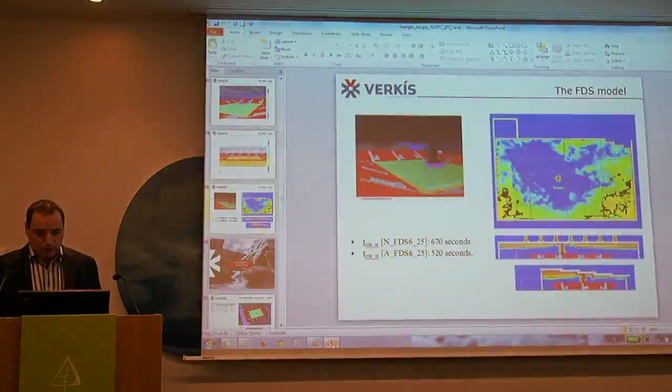So this was to show you how much work it was. It was a huge competition for Iceland and quite a big project. I think as the head of Fimleikasamband, he was rather stressed about it, and I think everything went well.

Of course, the day before the competition, David and I and some people from the Fire Brigade went through an on-site inspection. So you can see at the top that they've indeed created this famous passage in the corner. It was actually much wider than we asked, so I was very happy about it. But these are the good things.

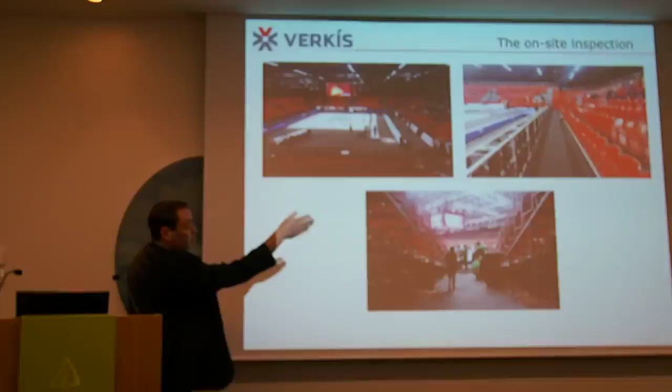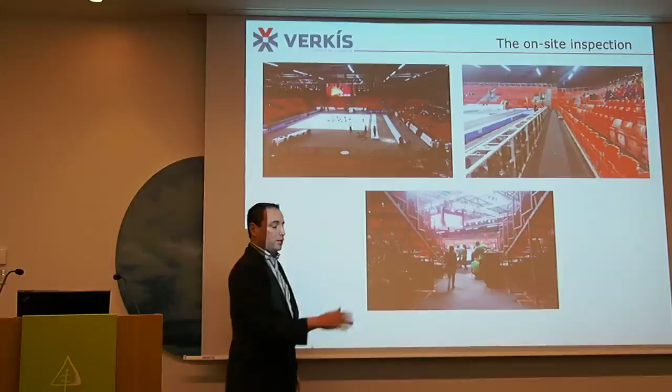You can also see we have a sufficiently wide evacuation route over there on the right, and you can see that this is just supposed to be 1.5 meters wide minimum, and this is much wider than what we asked. Now, these are the good things. Of course, not so good things, but okay, it could be improved.

After this inspection, you can see that there is a lot of equipment in the escape routes. And also these light panels over there. It narrowed the passage a bit, a bit less than 1.4 meters, so we had to have them moved a little bit. People will still be able to move them by hand and evacuate.

Of course, the classical problem is, I think there are 2 or 3 evacuation doors that are completely blocked with dustbins and all kinds of things. So we have to tell them to make sure that they remove everything from this.

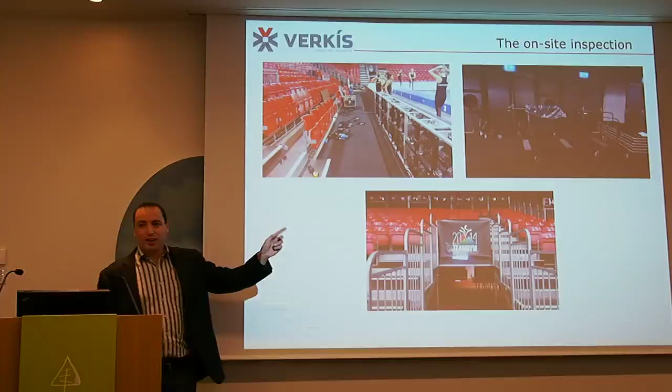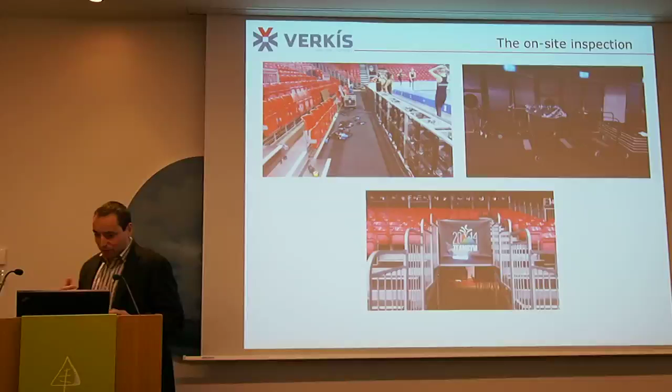And also here you can see this is the evacuation light from the stands, and they did put this logo, so I had to go and tell them at every evacuation step, okay, move this one. You could put this logo, but they just had to put it a bit higher, so that evacuation lights are very visible. So these were maybe the things that could be corrected, and I think everything went fine.

So now as a conclusion, if you look at the table at the top, you can see here in both normal and adverse conditions the critical time from FDS is significantly higher than the evacuation time from Pathfinder. So this means it's good. It means that people have a sufficient safety margin to evacuate before they get into these dangerous conditions.

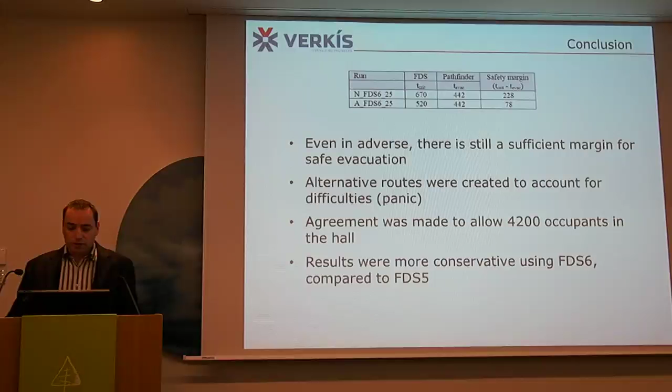Okay, so we created some alternative routes, especially for panics. So finally an agreement was reached to have something like 4,200 occupants. And I also proved in this lecture that FDS6 was actually more conservative than FDS5.

Okay, it's very difficult. That's probably the most difficult thing. First of all, what can burn, what cannot burn, and so probably this 10 megawatts. I don't think we can expect a 10 megawatt. That's actually a truck inside the room, something like this.

Question about the design fire. Yes. The placement of the design fire. You placed it in the middle of the room. Yes. What happens if you placed it close to one of the exits and block the exit? That's a very good question, especially if you look at this one.

This is the main entrance, most of the people will go this way, and we have 5 different exits. So we thought about it because here they were selling some drinks and some food. So you could imagine somehow a fire in this area. But in this case, what was very crucial is people evacuated from the stands.

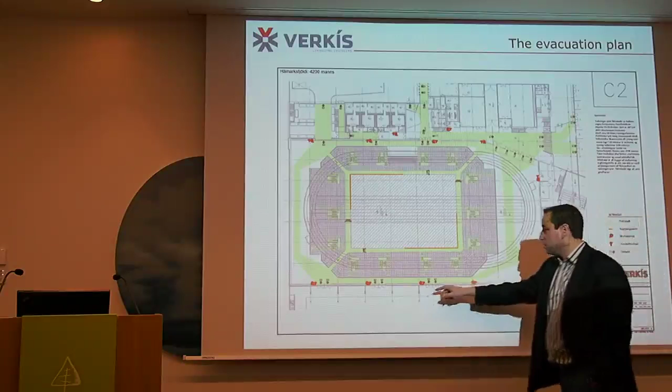This was difficult, and once they were on the floor, it was not a problem to go and evacuate all this way. And there is such a good evacuation plan in this building that once they were on the competition floor, they always could go this way or this way. So even in this case, this difficult case, it would be okay for evacuation.

But if you block just one route from the stands, from the floor. This is why I wanted, this was in the previous design. For example, here's let's say a lot of equipment for sound. So maybe you could have a fire below blocking, let's say, these two stairs. And in the previous design, people would have been stuck over there.

But in this case now, because of these evacuation routes on the competition floor, you can all go down this way. So that's actually much safer. It gave alternative possibilities. I believe it will still be safe, thanks to all these new routes. Is it okay now? Yeah.

I'm just wondering, did you tell them to have a certain amount of space behind the seating area? I mean, between the seating area and the exits, the passage, not inside? No, on the other side, it's much wider. You can walk under, this is just seats. This is a few meters. I think it's about 3 or 4 meters in the worst case, right here and right there.

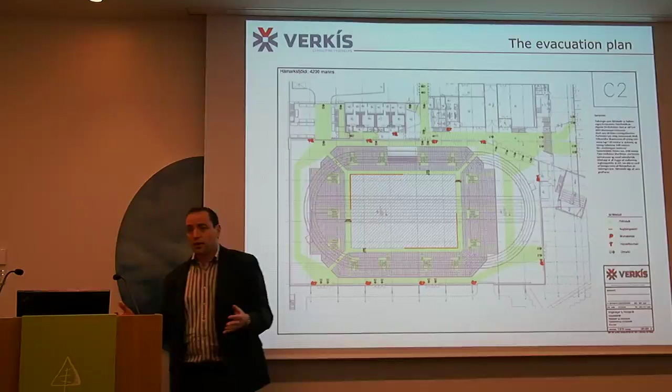So once occupants are on the floor, there are many possibilities for evacuation. So this was not the problem, and I think there are about 3 meters between the walls and the seats. And they can always walk a little bit under the stands.

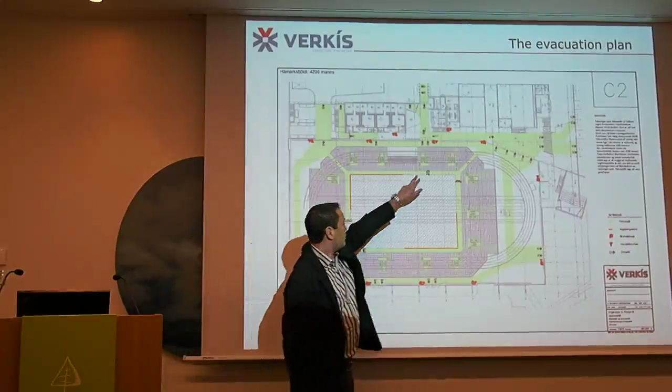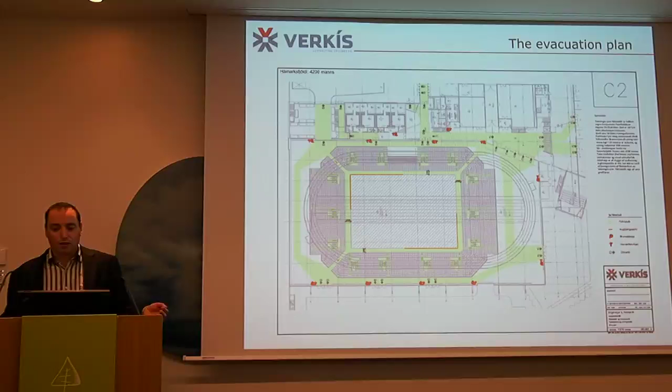And this is always the same answer I have to give. This is why we created some new evacuation routes. So even, if I understand the question, what if my fire is here, for example? Well, people will still be able to evacuate this way. So I designed it so that you are not trapped. There was always an alternative escape route, whatever realistically happens. Okay.